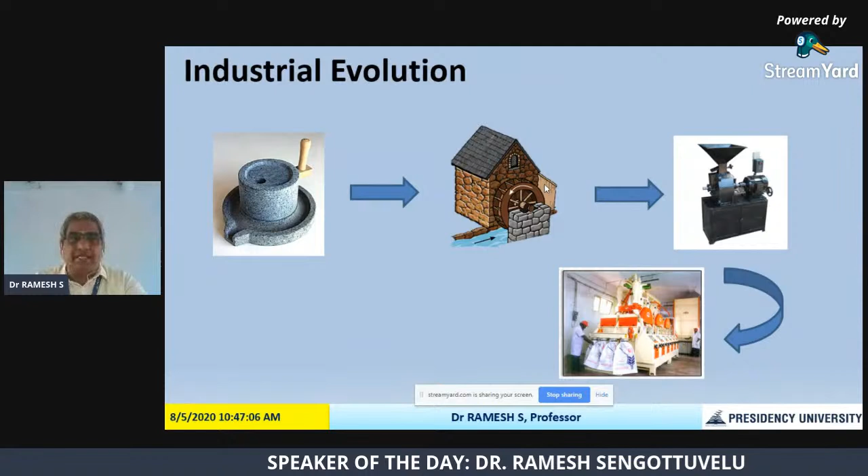Then the next evolution, steel came into that practice, and they prepared the grinder machine. Now nowadays the flour is made with continuous process monitoring devices, and automatically it is packed and comes out to the market. So this is how the flour-making process itself has some evolution, from olden days to the present day.

So the same way, industry revolutions have stages. The level of complexity is the matter in this industrial evolution. The first level introduced mechanical production machines powered by water and steam. It evolved around the end of the 18th century, which was a more complicated approach for that time.

Then with some technology development, the second industrial evolution came. The invention of steel started, and mass production lines were there, all powered by electric drives. This second industrial revolution happened at the beginning of the 20th century.

Then the third industrial evolution, through the use of electronics and information technology, brought further progression in autonomous production. In this third industrial evolution, computers or CNC machines came, but they were indigenous machines - they did their work based on whatever instructions were given, not going beyond that level of instruction. This evolution came around the beginning of the 1970s.

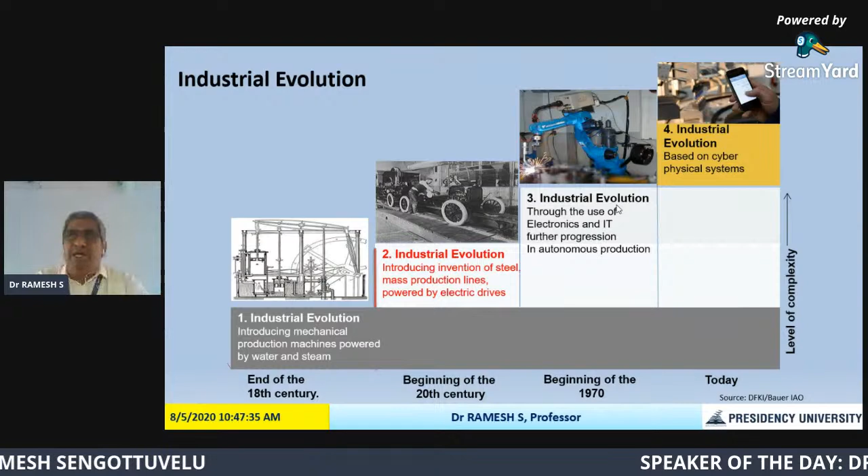So now in the present day, we are in the fourth industrial evolution. Computer science is booming, information technology is booming, everything is booming nowadays, and along with that, interrelated departments - mechanical is now supposed to join hands with information technology and utilize the internet of things scenario. Everything is there in the field.

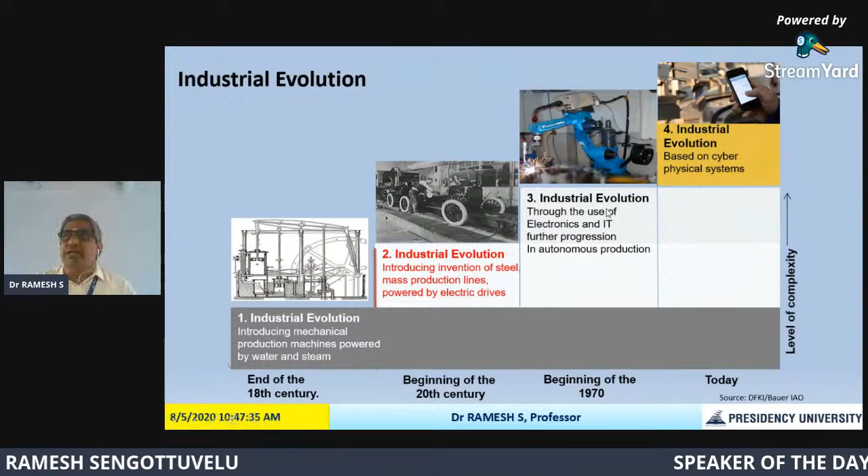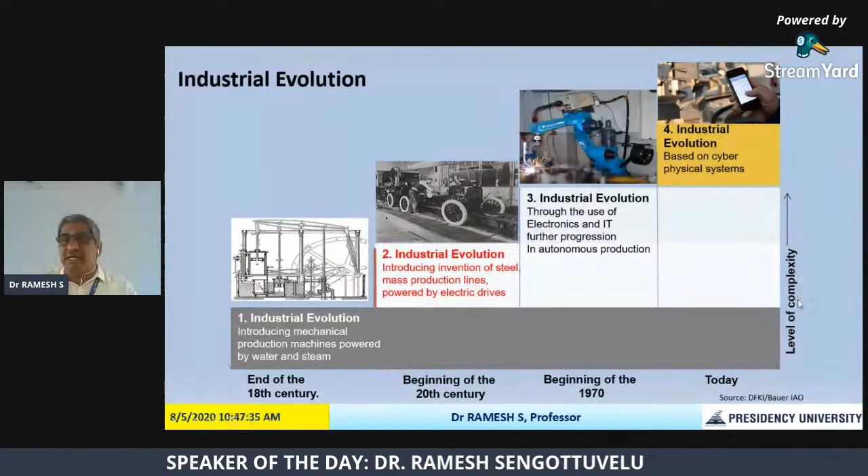So this fourth industrial evolution, Industry 4.0, is based on cyber-physical systems. The difference between Industry 3.0 and 4.0 is that here everything is done by electronics and IT components, but the data is recovered through cloud computing. All the data is taken care of, and by using that data, production levels are upgraded and get some advancement - that's today's technology. So level 1, level 2, level 3, level 4 - the level of complexity keeps increasing because of the technology, and that's how we reached today's position.

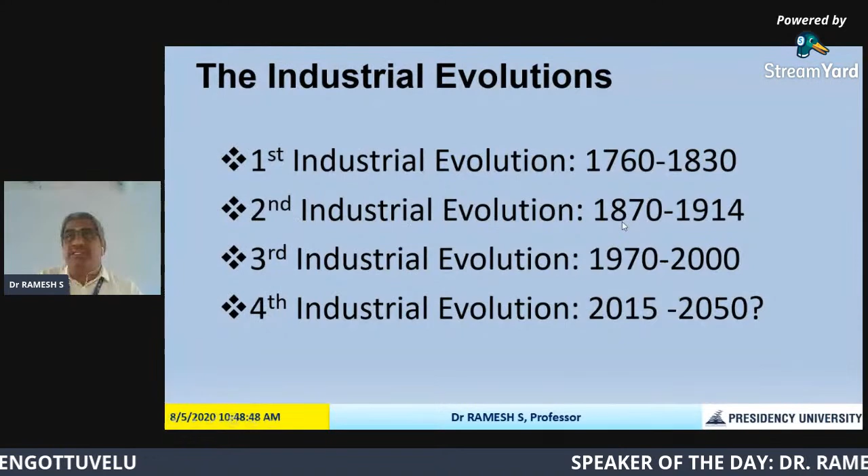So now let's see the next thing. I want to clearly discuss from which year to which year Industry 1.0, 2.0, 3.0 existed. The first industrial evolution was between 1760 to 1830, and the second industrial evolution was between 1870 to 1914. In the period between these, there was no progress in developments - whatever was evolved, people utilized during that break period.

The third industrial evolution spans 1970 to 2000, and the fourth industrial evolution, we guess, goes up to 2050. It may even end earlier, maybe by 2025 or 2030. Then for the remaining periods, we will use this technology only for the next phase of evolution. That's what is going to happen. So this is the industrial evolutions, period wise.

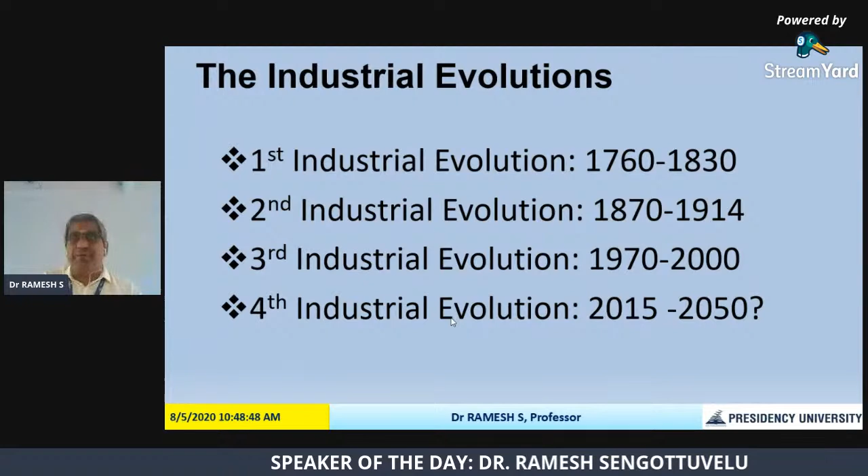Here, in the industrial evolution of 1760, the energy used was steam power and the mechanization of processes, the development of mechanical machines. By using these mechanical machines, factories were established, like textile, iron, and chemical industries, developed during the first industrial evolution period. Whatever products were developed during that period were moved using locomotives for logistics purposes. The locomotives were also developed, and by using that, logistics was taken care of.

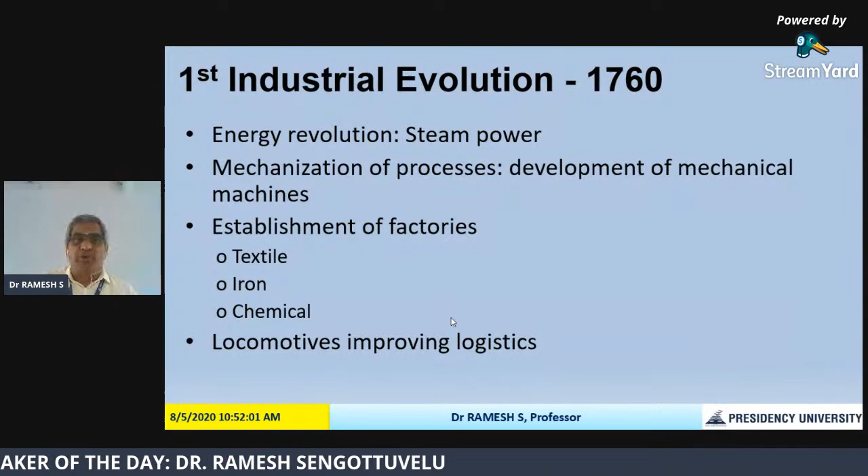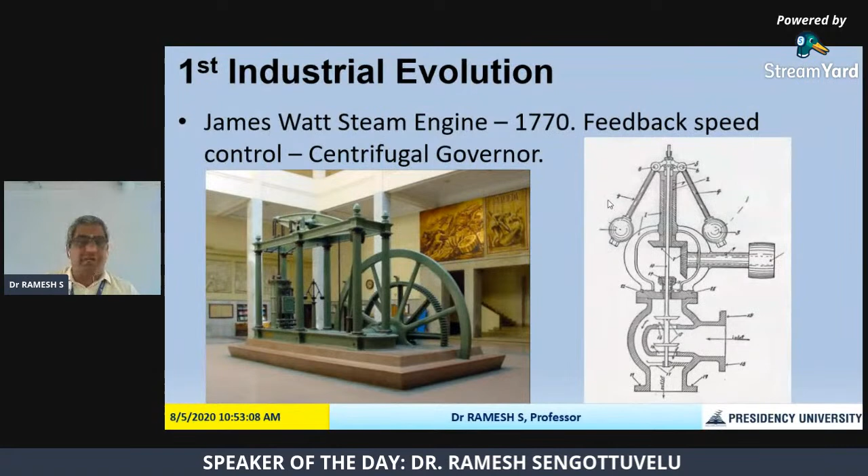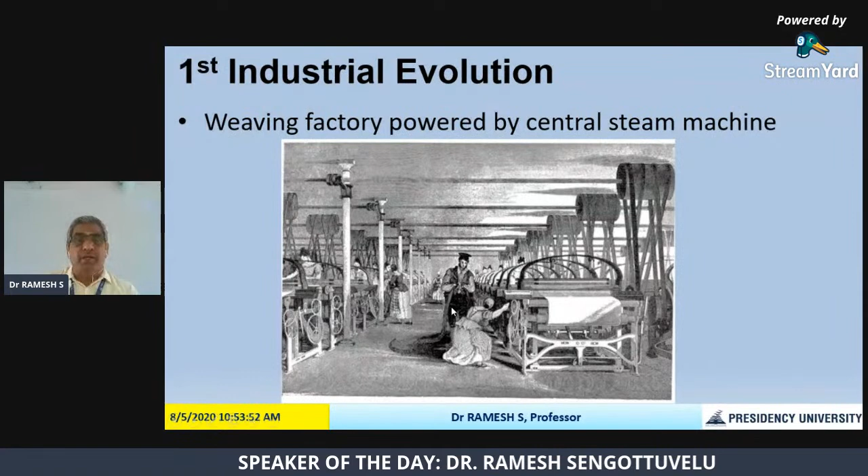Then the next one is the second industrial evolution, which happened in 1870. The energy used in this period was electric power in all the factories. During that period, telecommunication was developed through telegraph and telephone technology, and machining was developed in the shop floor, conventional machining like turning, drilling, and milling operations. The automotive industries boomed, with large series production taking place.

People started analyzing their processes using manufacturing methodologies. They created methodologies for studying time and motion within operations. They studied operation times and tried to improve machining sequences. This happened in the second industrial revolution itself, and the better management perspective was initiated.

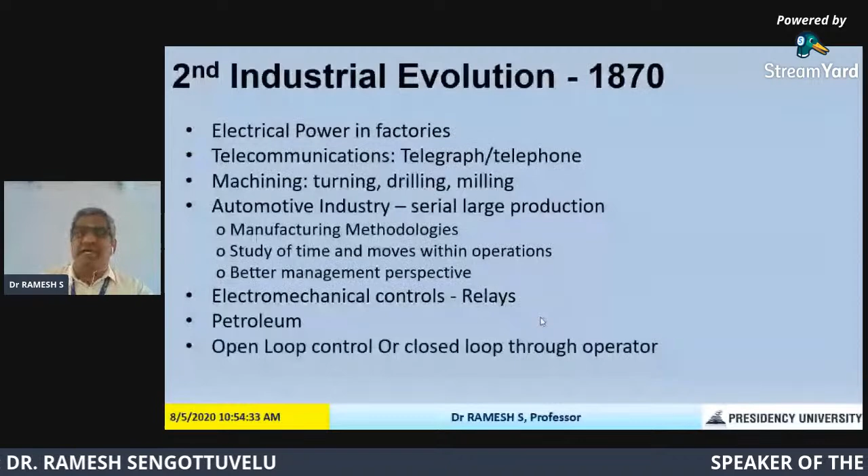In fact, electromechanical controls were also developed during that period using the relays concept, and petroleum industries also developed during that period. Here, the feedback control used was either open loop control or closed loop control through the operator, who had to monitor these open loop and closed loop conditions.

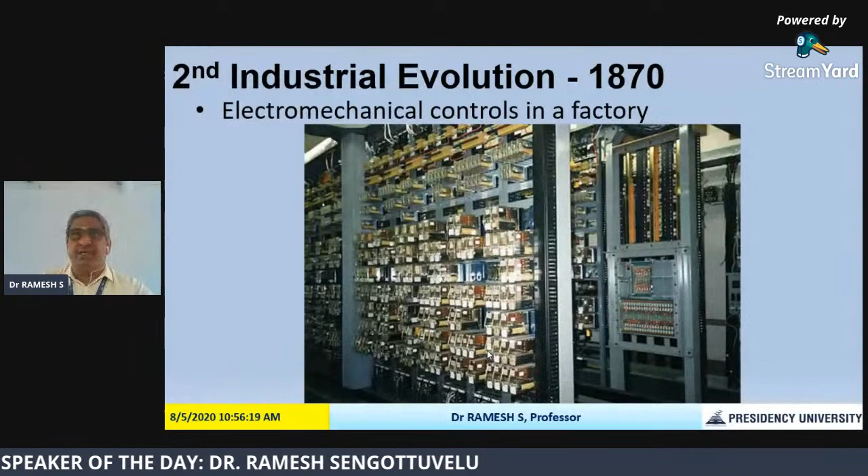In the third industrial revolution, 1970, process automation was developed using feedback loop control, sensors, and actuators. During that time only, CNC machines arrived and replaced the conventional machines. The communications were developed through programmable logic control and robotics protocols.

The data which is recovered, like synoptic and production history, came from there. And because of this, efficiency and quality assurance were created during this period only—the efficiency and quality of the product, everything is monitored through the efficiency and quality assurance category.

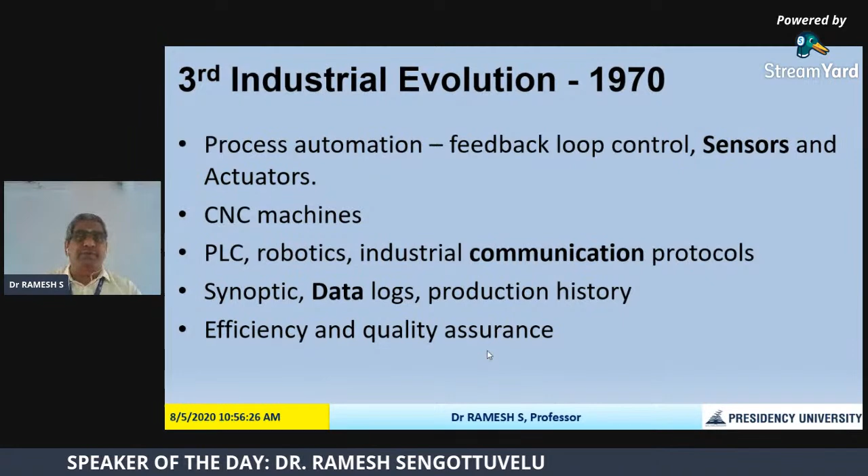These are examples of industrial automation by programmable logic controller, and industrial automation by modern PLC cabinets. This is industrial application automation by SCADA and manufacturing execution systems, ERP, and synoptic data logs for the shop floor. This whole shop floor is monitored by SCADA, MES, and ERP—all those things. It's a computerized control only.

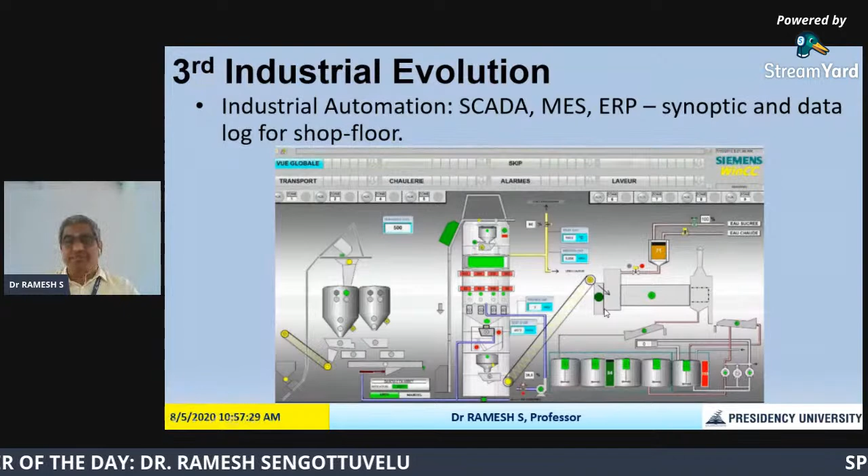And the third industrial evolution, some shortfalls we found. What are the shortfalls? Actually, it improved productivity, product quality and cost reduction through automation. That is fine, fantastic. And the high level of discipline and management methodologies also improved.

And like sensors, actuators, data acquisition we used, but still no machine reasoning is developed. That means the machine has not started thinking on its own. The machine language, that means one machine and another machine, it is not able to talk to each other. That thing is not happening. So that's what is meant by no machine reasoning.

What is the best decision when some unexpected event happens? For example, why it is started, actually the shortage of raw material when production is going on. And when the human says there is no raw material, then only we understood there is no raw material. And the demand is changing, that means on the customer end there is some demand. If I need this kind of product instead of this configuration, like that some demand is coming, but that demand is not intimated to the machine.

The machines only follow orders. That means the machine takes the order from the human and does that work. So now we are thinking, why don't we give the instruction directly to the machine through some channel? That's the evolution of the fourth industrial evolution.

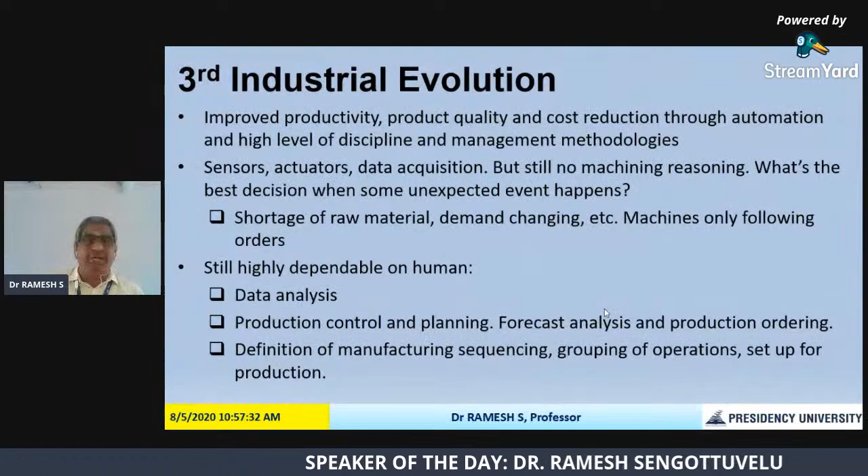So still it is highly dependable on human data analysis. That means whatever production is going on, today this 8-hour run of the machine, these many components manufactured, and where is the problem - some analysis takes place, that data analysis. And production control and planning, forecast analysis, production ordering, defining manufacturing sequencing, grouping of operations, setup for production - all of this is done by the human only, dependent only on the human.

But now the fourth industrial evolution comes in from 2015 onwards. The new scenario which started is the demand for highly customized products and short product life cycle. That means the product which is in usage goes off very fast, so we need to meet that next level of products.

Then highly competitive markets - there are a lot of competitors coming, so you need to match customer expectations. And environmental restrictions - these are all the day-to-day scenarios that happen in industries, and they are not able to face these demands from outside.

And for customization, highly flexible production lines are required to meet this demand. It must be productive and cost effective also - when you are spending more amount, you need to take it back very fast. That's the productive and cost effectiveness that should be there. And make-to-order - so these are the customization aspects they started thinking about.

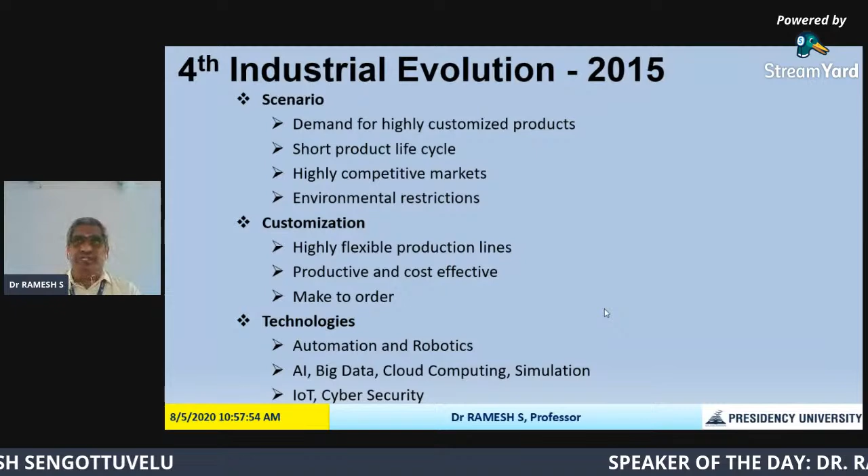So the technologies we implemented in the fourth industrial evolution are automation, robotics - we brought that in - and artificial intelligence, big data, cloud computing, simulation, internet of things, and cyber security. All these technologies were brought into the fourth industrial evolution.

Now this is the scenario available in the present day fourth industrial evolution, that is Industry 4.0. So let me give you a video to explain this Industry 4.0, then I will proceed further.

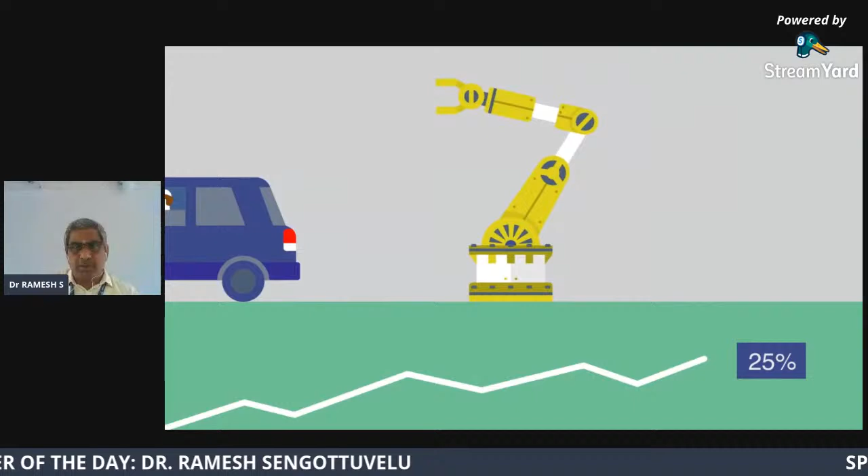The Internet of Things has the potential to increase global productivity up to 25% by 2025, which could translate to an economic value of $11 trillion. Industries like manufacturing are embracing the potential of the Internet of Things. Many production facilities are already using processes and supervisory control systems with connectivity. The Internet of Things for manufacturing is a family of solutions that combines the capabilities of analytics, cognitive computing, and the Watson Internet of Things platform to drive operational efficiency across the factory value chain.

This solution benefits the manufacturing industry in three main ways. First, it helps plants get 100% efficiency out of their equipment by identifying and solving issues before they cause delays. Second, it makes processes and operations cognitive, so plants can produce maximum quality and yield from raw materials and manufactured components. Lastly, it helps plant managers better manage resources, improve worker expertise, and provide a safe working environment. Advances in these three areas define a new wave of connected manufacturing, one that revolves around things, process, and people.

Let's take a look at how this works for Simon, the plant manager for an aircraft manufacturer. Simon oversees the production of key components for large commercial aircraft, and his top priorities are meeting production deadlines and producing airplane parts safely and efficiently. One of his biggest clients needs to move up their delivery date by 3 months. Simon and his team use the Internet of Things for manufacturing, which will help them deliver earlier than originally planned.

An equipment analytics solution identifies problems with equipment health and performance before they happen and prescribes maintenance procedures so Simon's team can avoid equipment failure and downtime, getting maximum effectiveness out of their equipment. To ensure components meet quality standards in normal production, Simon uses a quality analytics tool to identify variability in the manufacturing process in real time, allowing equipment operators to adjust process parameters based on plant conditions that could affect quality. By monitoring quality in real time, Simon's team can avoid producing faulty components, saving time and money.

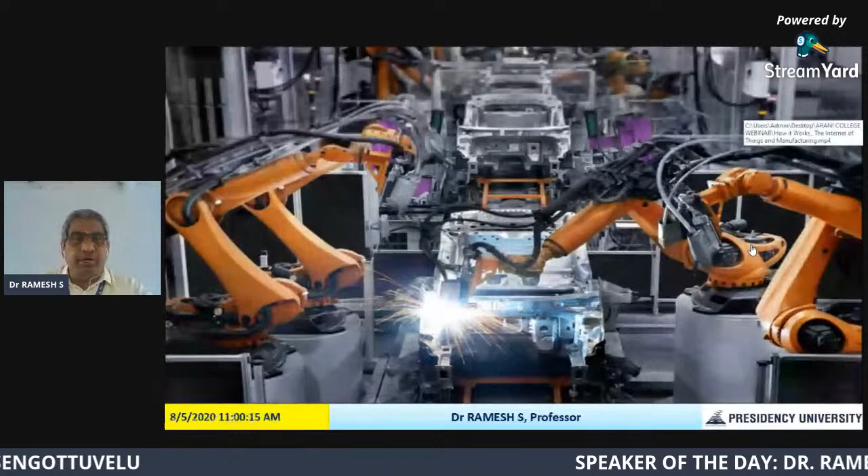Okay, with this introduction of the Internet of Things in manufacturing, we'll proceed to Industry 4.0 as a smart factory that I want to introduce. That smart factory, what is the smart factory actually? It is a collective term for technologies and concepts of value chain organization.

That value chain organization includes both horizontal and vertical value chains. The vertical value chain refers to everything from design to service. And the horizontal value chain refers to customers, suppliers, and key partners. They are all considered the horizontal value chain components.

The stages are: product design, which is the design stage. The second stage is production planning, how the product needs to be launched, that needs to be planned properly. And production engineering, meaning we need to choose which machine is better for completing particular operations. The production engineering department works on choosing machines, sequence, and everything.

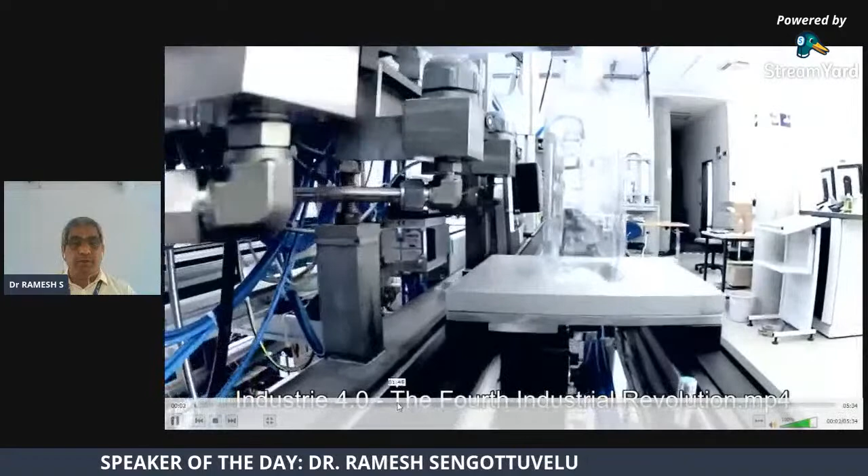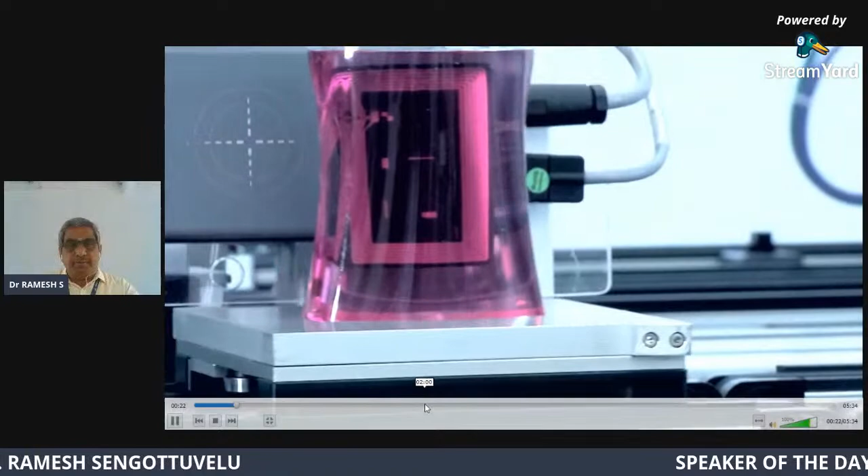A vision of tomorrow's manufacturing: products finding their way independently through the production process. In intelligent factories, machines and products communicate with each other, cooperatively driving production. Raw materials and machines are interconnected within an Internet of Things. The objective: highly flexible, individualized, and resource-friendly mass production. That is the vision for the fourth industrial revolution.

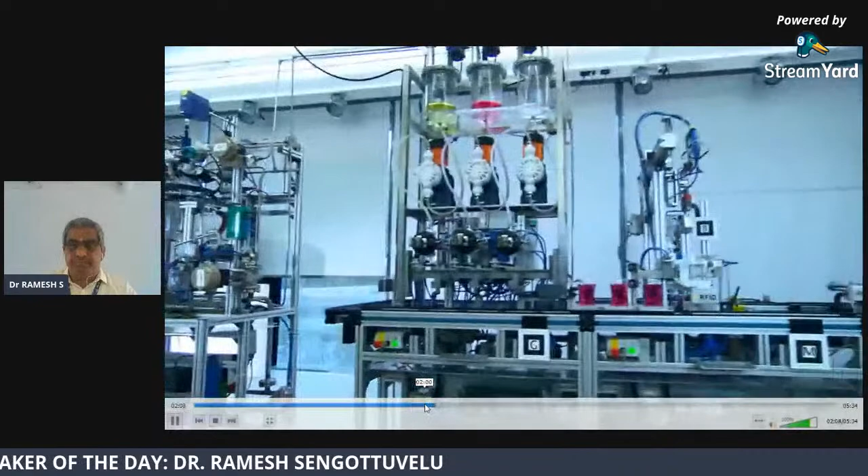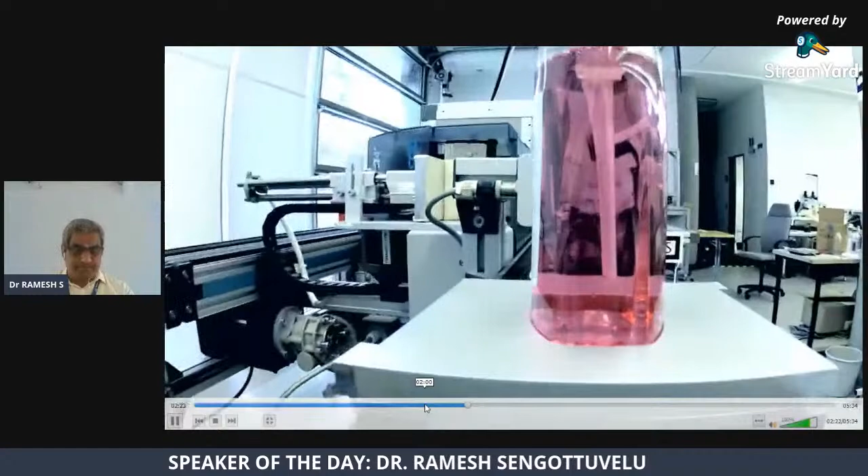A bottling plant for liquids, set up together with Siemens, is used to demonstrate the most important components of the intelligent factory of the future. Each bottle contains an RFID chip storing a precise description of how it has to be processed - which liquid, which lid, and which label. At each station, the bottle communicates directly with the machine, telling it how it has to be processed. At the end, the computer checks whether the bottle has actually been produced as desired.

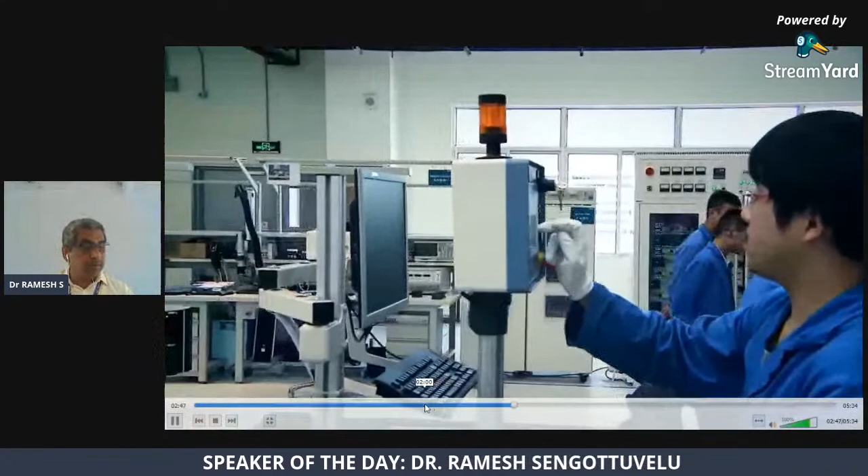Factories with networked machines and products are already in existence today. In the future, however, these hitherto self-contained systems will be connected together in a comprehensive network. All devices, machines, and materials will be duly equipped with sensors and communications technology and connect to each other. These systems are known as Cyber-Physical Systems. The highlight is that they communicate with each other and also control each other cooperatively.

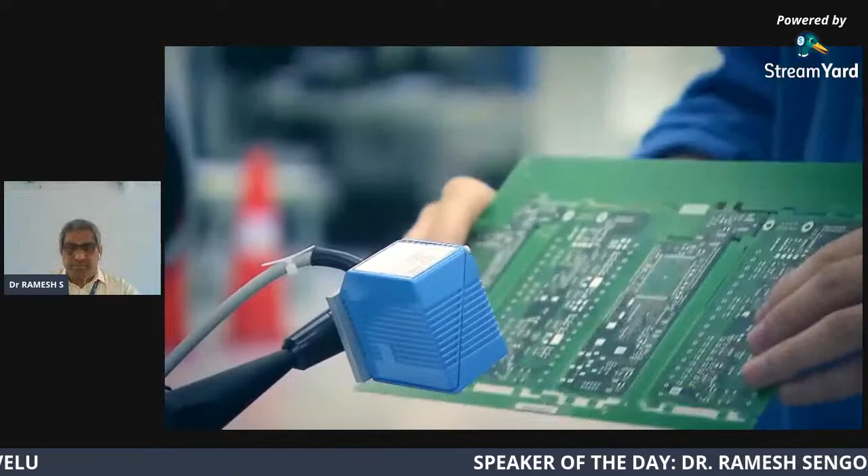For the customers, this means tailor-made products at relatively affordable prices. For industry, it means highly flexible mass production that can be rapidly adapted to market changes, because in the future, product life cycles will be even shorter. Another reason why it's increasingly important to depict engineering across the entire life cycle. Maintenance, for instance, is planned in from the very start.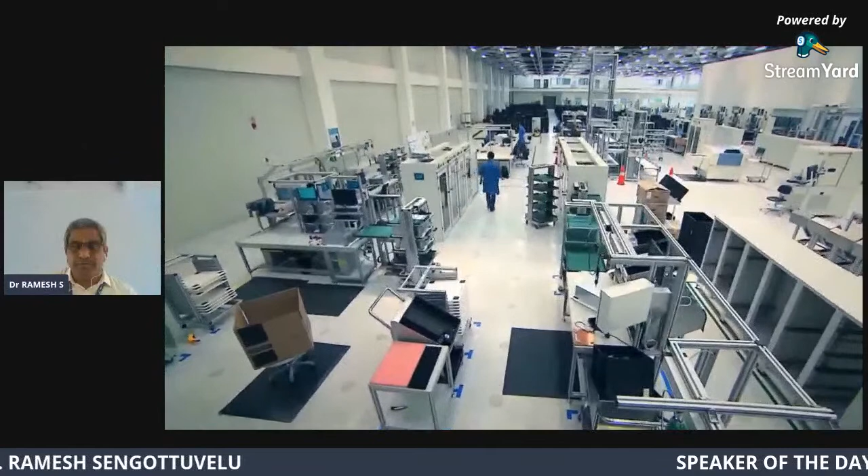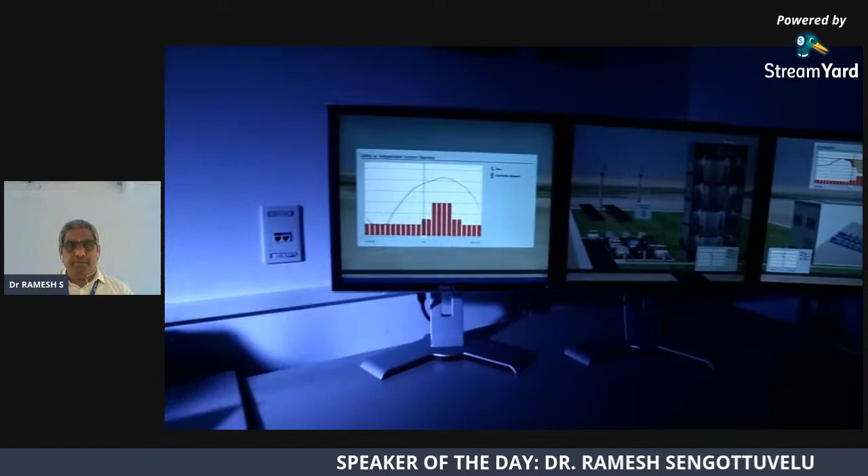At Corporate Technology in Princeton, a cyber-physical control is being researched even today. The vision: the control and all linked sensors are connected to the internet.

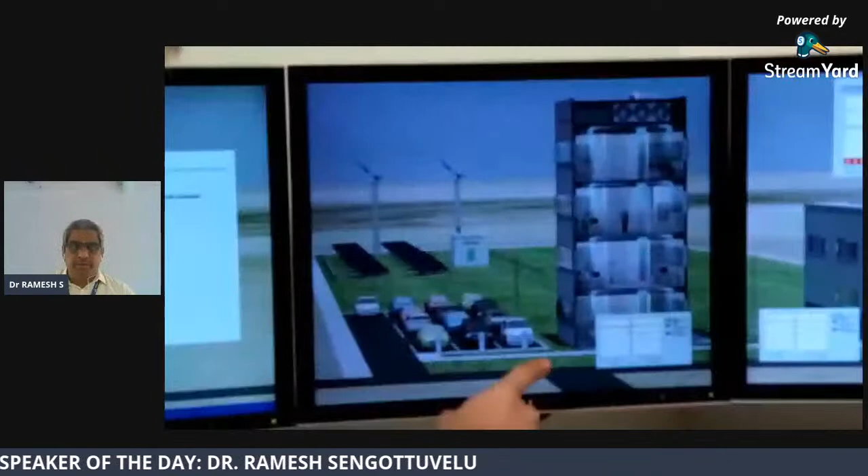One potential scenario is enabling the PLC to react to utility pricing information in building automation. We can enhance PLCs to use simulation to calculate how much to pre-cool a building, with the ultimate goal of turning off the cooling system during peak times.

But that's just the beginning. We prototype capabilities in the PLC to access big data in cyberspace in real time. And we have also enabled a network of PLCs to connect to a dynamic simulation of the entire physical process.

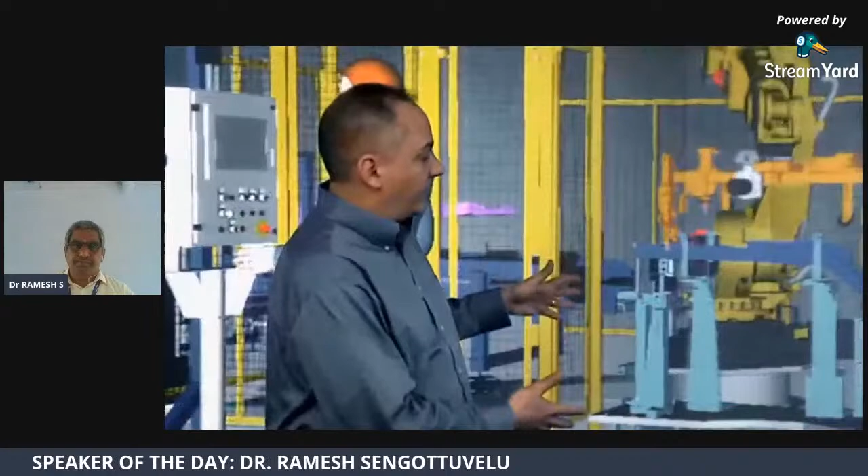Siemens is shaping the future of industry. Connecting the real with the virtual world of production is making it possible to enter entirely new dimensions in quality, efficiency, and flexibility. The company is well prepared for Industry 4.0.

Okay, fine. So with this background, Industry 4.0 and how the machines are connecting with each and every machine - that means machine to machine, how it is communicating their language in the sense of sensors that we have seen in this slide.

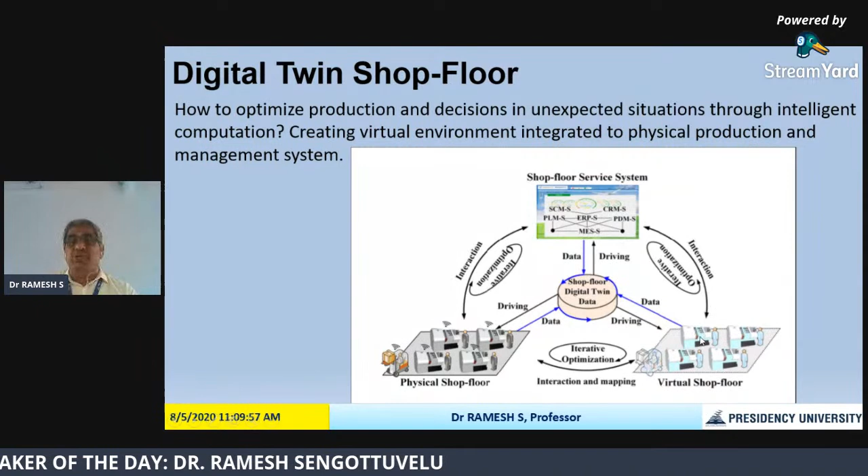These all generate experience data which proceeds to the shop floor digital twin data. This compares with the shop floor service system and physical shop floor, and also compares the virtual shop floor and shop floor service system, creating interaction and giving the exact required data. These three things operate in a balanced way and give exact dimensions.

That is what optimizes production and decision-making in unexpected situations through the intelligent computations taking place inside these arrangements. The physical shop floor is implemented by means of sensors and automation embedded modules that generate and integrate data.

The main challenge is the different protocols available, such as Modbus, Profibus, and industrial Ethernet. The virtual shop floor gathers information from CAD/CAM systems, simulation systems, and management systems.

For example, it can translate 3D drawings into CNC code, and then simulate the production sequencing. They write the production sequences, sequencing it through virtual copies of actual operational stations, constantly updated by information received from the physical shop floor.

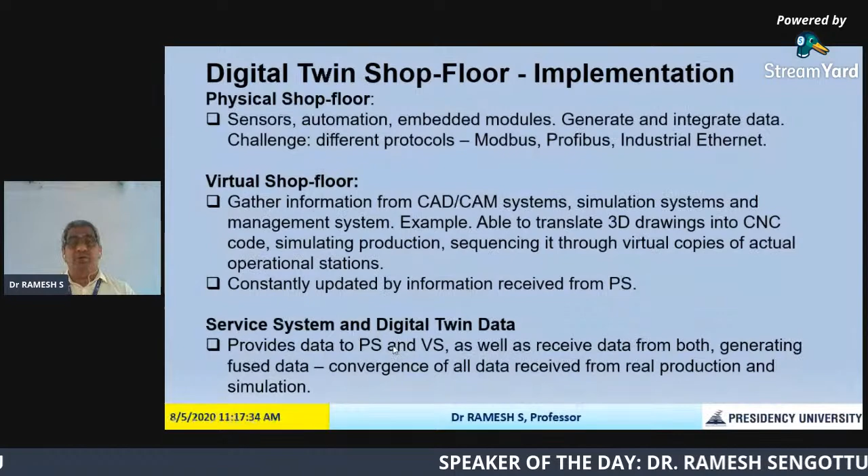Regarding the service system and digital twin data, it provides data to the physical shop floor and virtual shop floor, as well as receives data from both, generating fused data that converges all data received from real production and simulation. It is converging between virtual and physical systems.

This takes place through the Internet of Things collecting and providing data, powerful cloud computing enabling big data and artificial intelligence, quick reactions regarding planned and actual production, real-time decision making through data analysis, and modern industry-based high connectivity—that is cyber physical systems. This will be the major player in high connectivity.

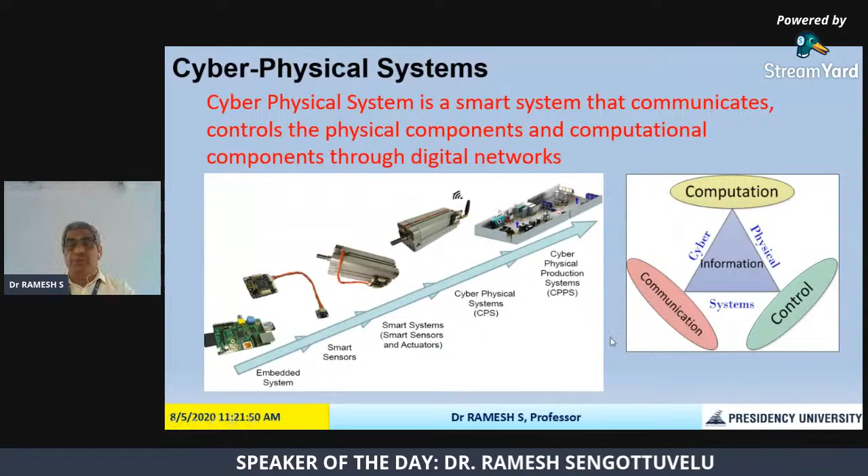Now, how does it work in the system? Here is the functional integration, meaning at the working spot different machines work together, and the data is available in the cloud.

That integrated cyber physical system receives that cloud data, and then takes care of condition monitoring and structural health monitoring—meaning the machine's life, since sometimes it gets worn out, and after some working hours it may become faulty. That is structural health monitoring.

And remote diagnosis, meaning watching how the machine is working, and remote control, meaning it is able to operate that particular machine also. This system is called cyber physical systems, enabling communication, monitoring, and control.

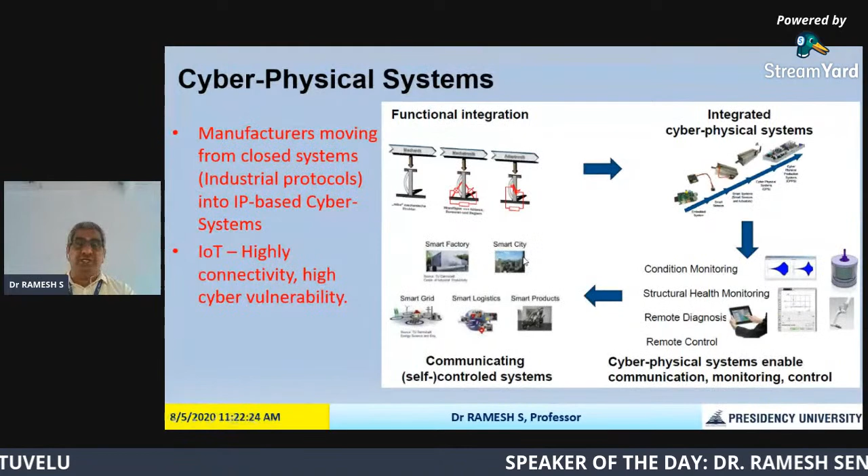Now this takes care of industry equipment across different industries—smart factory, smart city, smart grid, smart logistics, and smart products, like that. Smart factory means it can be controlled by means of CPPS communication, monitoring, and control devices.

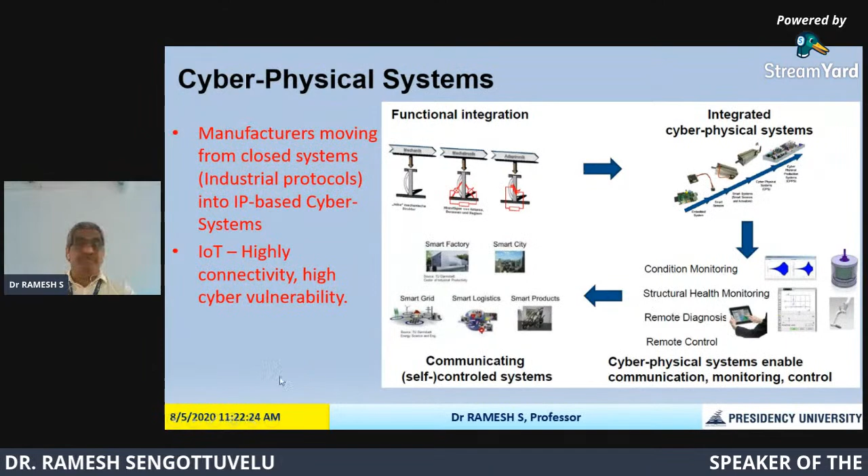Now I would like to talk about the Internet of Things. It is a system of interrelated computing devices, mechanical and digital machines, objects, animals, or people, provided with unique identifiers and the ability to transfer data over a network without requiring human-to-human or human-to-computer interaction. It is communicating objects based on internet technologies.

Internet of Service is a commercial transaction where one party grants temporary access to the resources of another party in order to perform a prescribed function and a related benefit. Resources may be human workforce and skills, technical systems, information, consumables, land, and others.

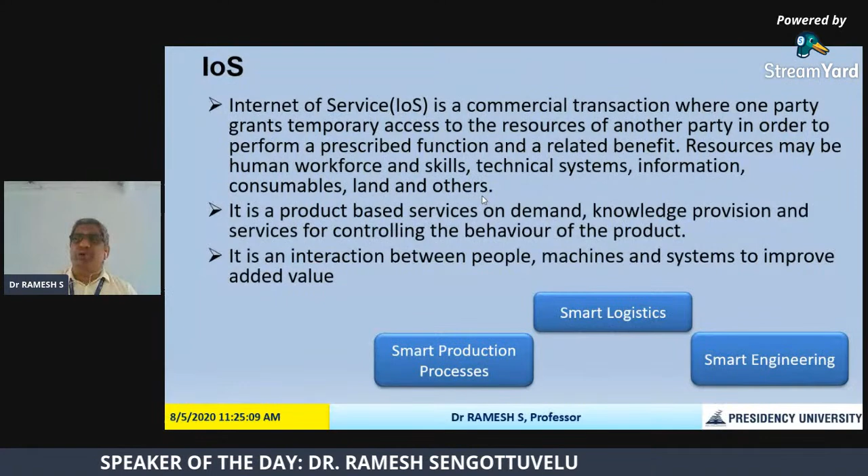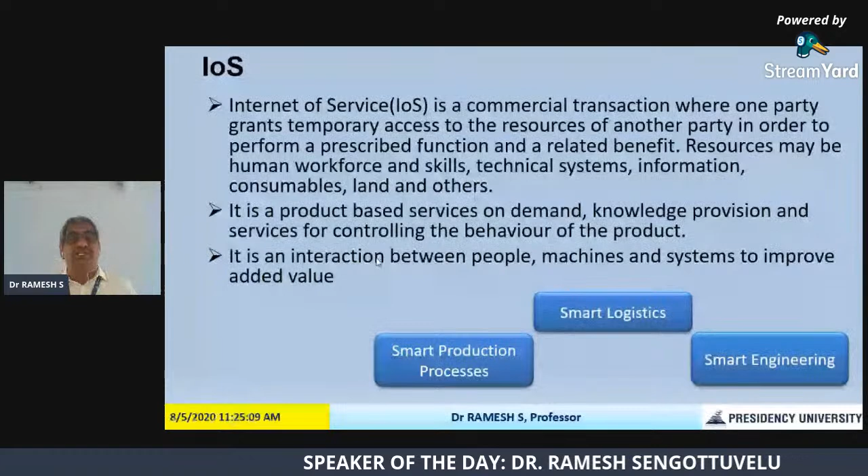Once the product is sold, product information can be monitored continuously, and the service provider can take care of the issues. It is a product-based service on demand, knowledge provision, and services for controlling the behavior of the product. It is an interaction between people, machines, and systems to improve added value. The Internet of Services may be in the form of smart logistics, smart production processes, and smart engineering, available in real-time implementation.

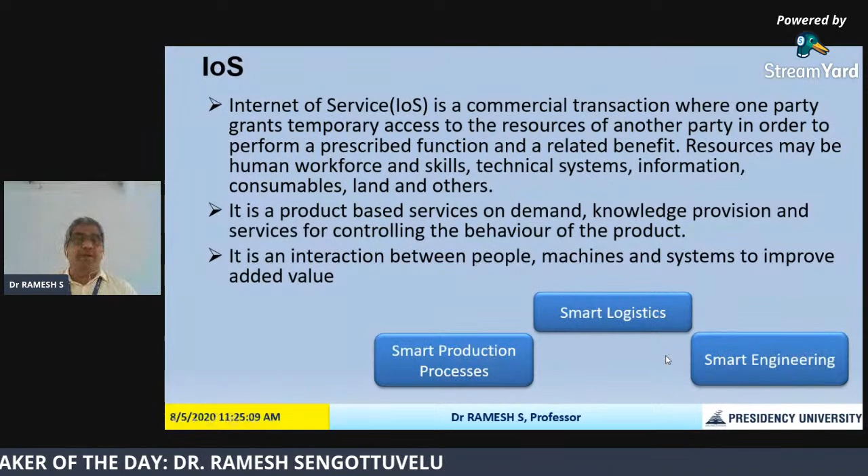For example, Rolls Royce does not sell engines to airlines these days. Instead of selling engines, they sell airlines hours flown - that means how many hours it is working. There's a contract for that: selling hours flown, and a service contract to maintain the leased engines. The airlines get a free engine when they sign up, and they monitor the manufacturer, Rolls Royce, tracking how many hours it works. They know after some hours attention needs to be given to that engine, so they take care of all those things. The hours flown is the important sales item in this case, so that's why it is called a service.

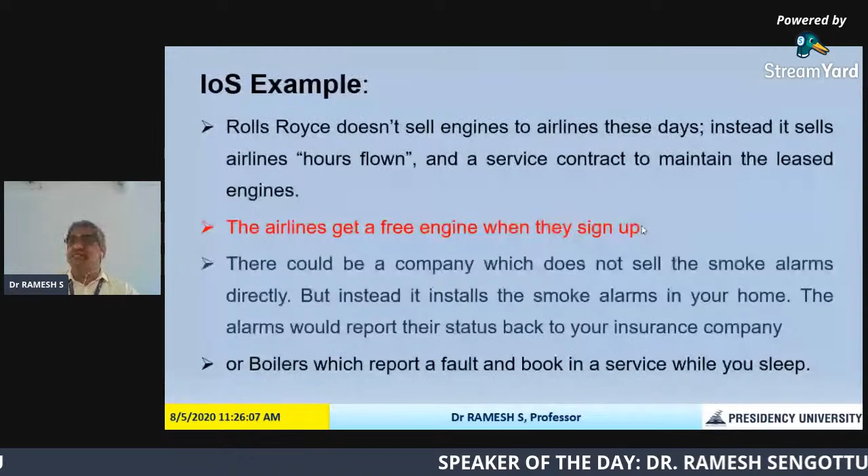There could be a company which does not sell smoke alarms directly, but instead installs the smoke alarms in your home. The alarms would report their status back to your insurance company. Or the boilers which report a fault and book in a service while you sleep. So this service happens unknowingly to the human, based on knowledge.

The next thing is Internet of Data. Data plays a major role in present technologies, so the Internet of Data is managed through Internet technologies. Cyber-physical systems are producing big data, and the challenge is development of a holistic security and safety culture.

In the context of this cyber security system, cyber physical systems monitor physical processes, create a virtual copy of the physical world, and make decentralized decisions. Cyber physical systems communicate and cooperate with each other and humans in real time over the Internet of Things. Both internal and cross-organization services are offered and utilized by participants of the value chain via the Internet of Services.

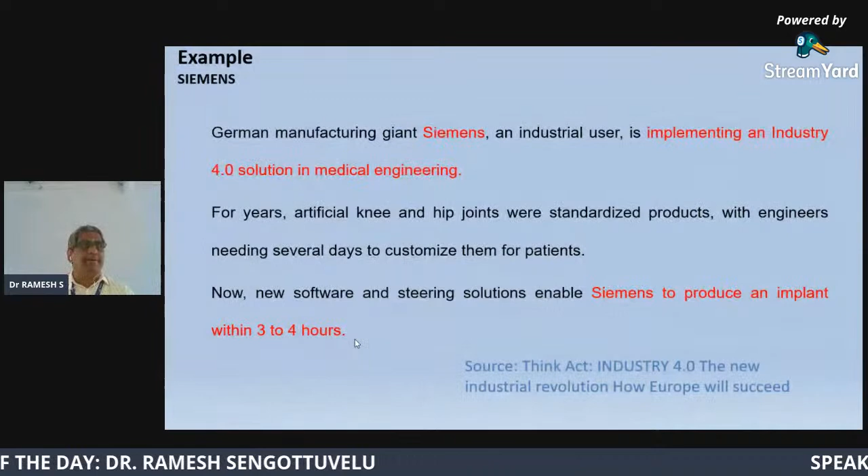Some softwares are there actually, but I'm not getting it exactly, let me check.

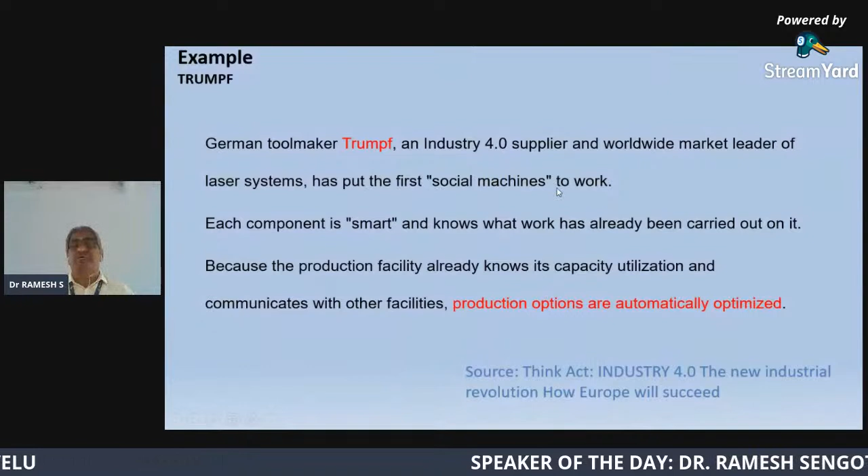Another company is Trumpf. The German tool maker Trumpf, an Industry 4.0 supplier and worldwide market leader of laser systems, has put the first social machines to work. Each component is smart and knows what work has already been carried out on it. Because the production facility already knows its capacity utilization and communicates with other facilities, production options are automatically optimized. So this whole machine itself has Industry 4.0 implemented.

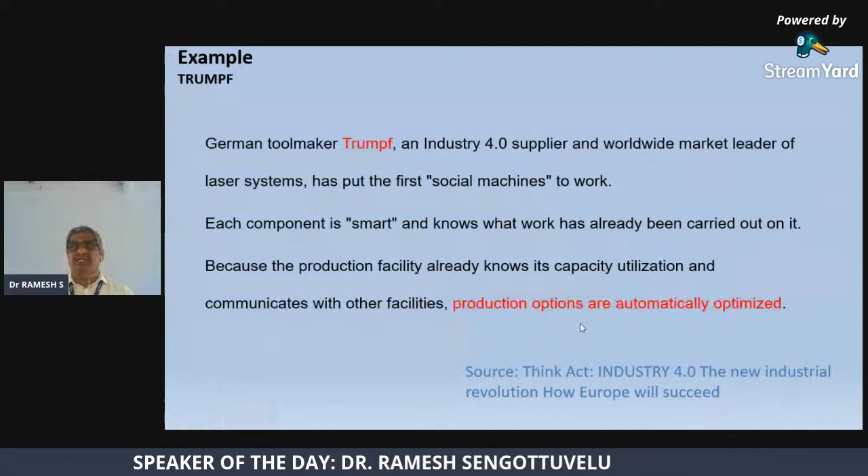And another video which is utilized in the automotive industry, that I can show you now.

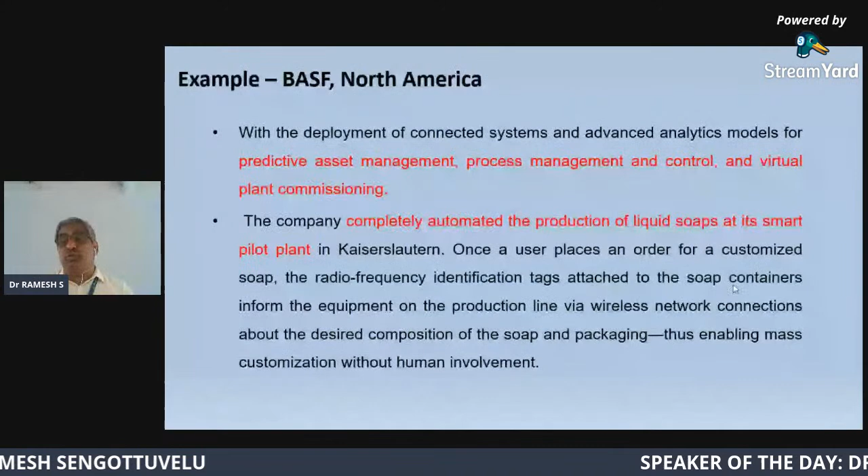Another example is the BASF North America company, with deployment of connected systems and advanced analytics models for predictive asset management, process management and control, and virtual plant commissioning. The company completely automated the production of liquid soaps at its smart pilot plant in Kaiserslautern. Once a user places an order for a customized soap, radio frequency identification tags attached to the soap containers inform the equipment on the production line, via wireless network connections, about the desired composition of the soap and packaging, thus enabling mass customization without human involvement. This is another company effectively implementing Industry 4.0, in their liquid soap manufacturing.

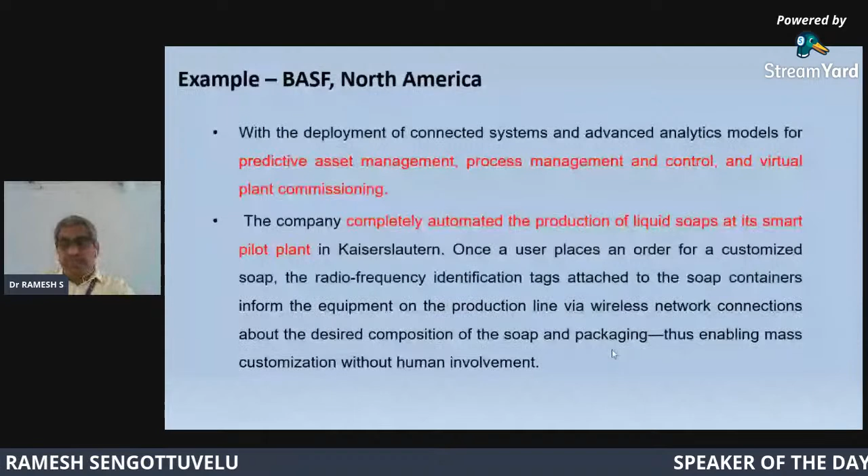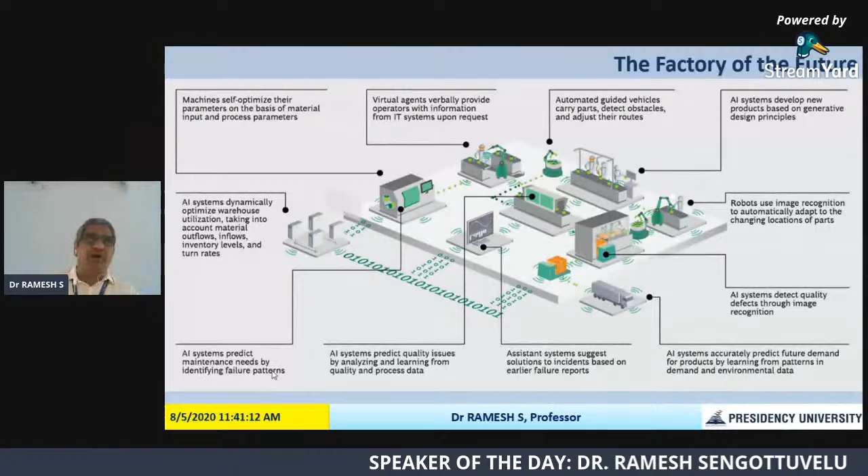Artificial intelligence systems predict maintenance needs by identifying failure patterns. By seeing the previous history, it is able to find out possible failures, from the machine's worn-out points, from the cloud data, and the sensors which send data to the cloud. From there it can take the data, analyze it, and find out the possible time of failures. That maintenance aspect will be taken care of by artificial intelligence.

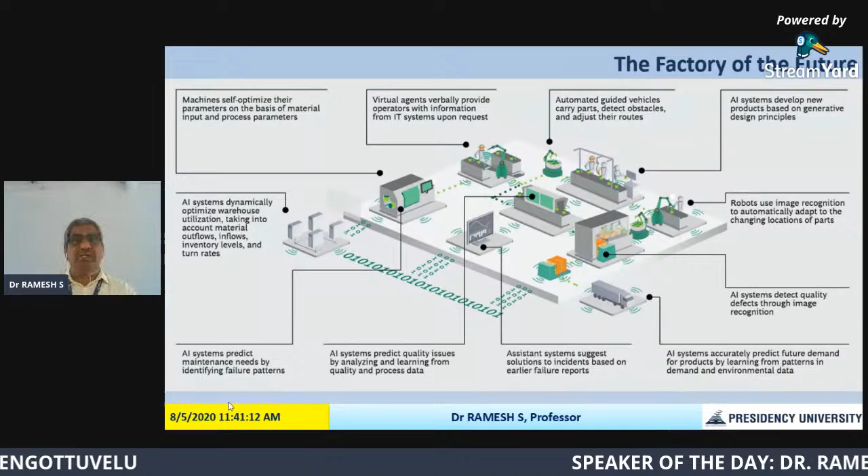Virtual agents verbally provide operators with information from IT systems upon request. Artificial intelligence systems predict quality issues by analyzing and learning from quality and process data. So not only from the quality department but from the user end also, they can find out quality issues, and it can be rectified in the real-time production area.

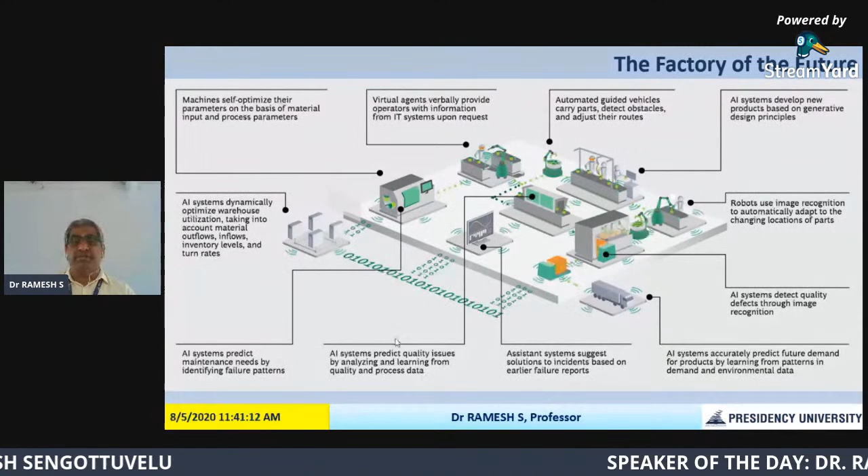Assistant systems suggest solutions to incidents based on earlier failure reports. Automated guided vehicles carry parts, detect obstacles, and adjust their routes. This AGV concept we have already come across in flexible manufacturing systems studies.

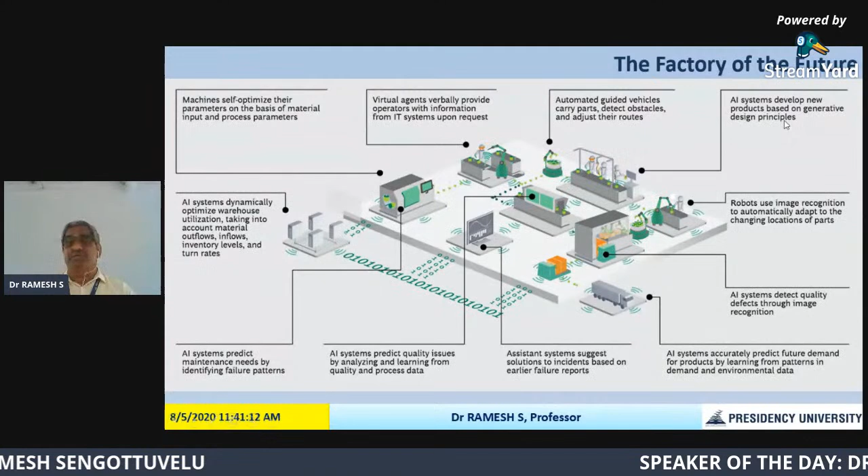Artificial intelligence systems develop new products based on generative design principles. Now here the robots use image recognition to automatically adapt to the changing locations of parts. It can store images, compare them with real-time production, and according to that image, adjust itself and carry out the process.

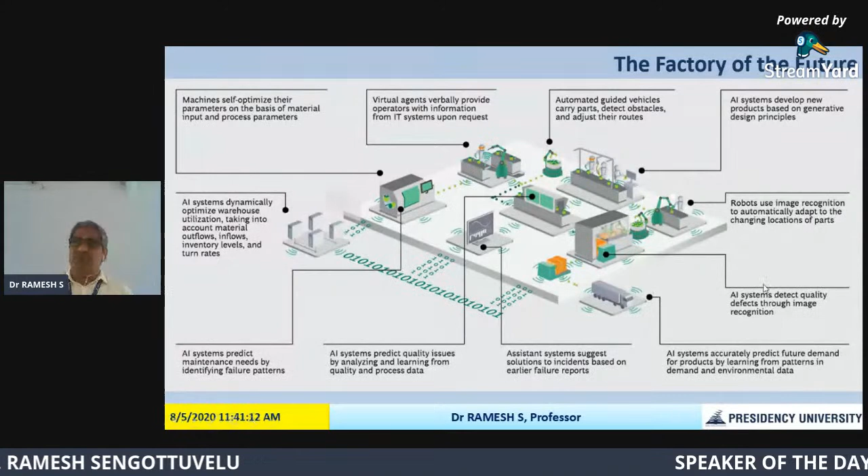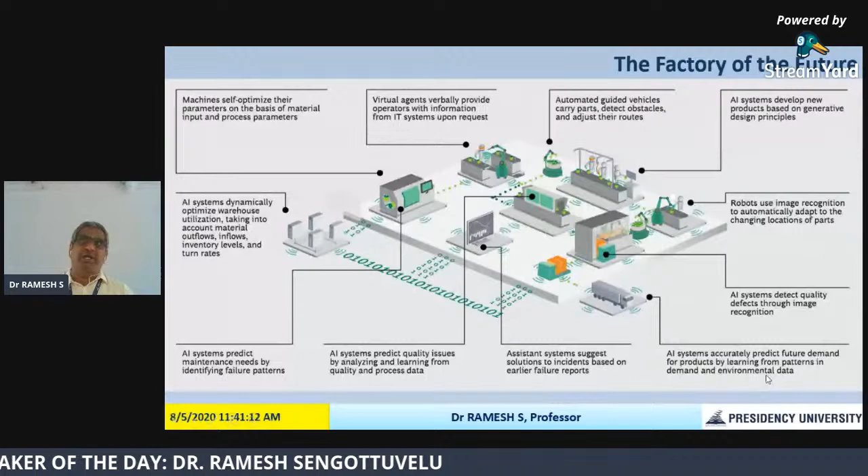Artificial intelligence systems detect quality defects through image recognition. This is also very useful in the day-to-day production area. Artificial intelligence systems accurately predict future demand for products by learning from patterns in demand and environmental data. This can especially be observed through the internet of services.